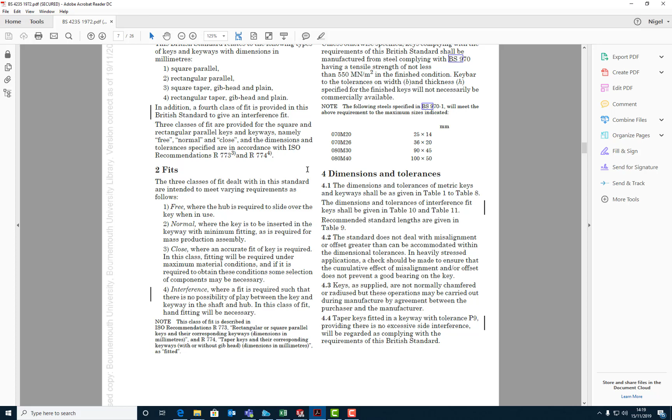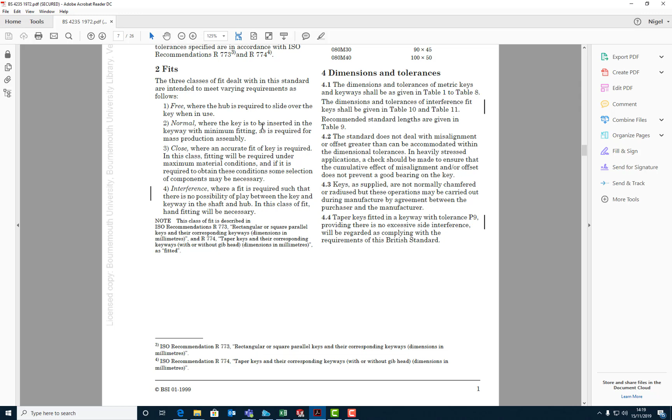So let's have a look on this PDF. I've put this PDF on Brightspace for you. This is all about metric keys and keyways, and it's BS 4235 Part 1 1972. So they've been doing this for a long time, and we still do it now. This is the way you do it. Some materials, don't need to worry about it, just have a look at this. Free, we don't want it to slide over. Normal, yeah, that sounds alright, doesn't it? That's the type of fit we want. We want a normal fit, so we just need to make sure we remember that as we scroll down.

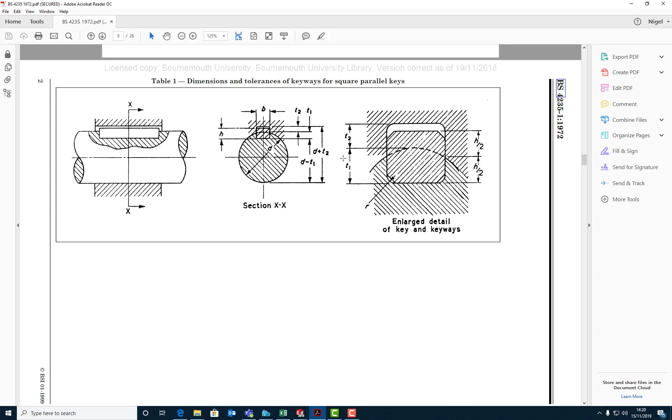Here's the dimensions of basically the holes that we need to drop in there. So this is the depth of the hole, T1, we just need to remember that, and B is the breadth. Let's have a look. Here we go. So the width B, that's nominal. Here's the diameters of the shaft. Now my shaft diameter was, if I can remember, 14. So between 12 and 17. That's my diameter there. So I need a 5x5 key. That's not the length, that's just the square section, 5x5.

And for a normal fit, on the shaft I need an N6 tolerance. Sorry, an N9, what am I talking about? N9. So that gives you between 0 and 30 microns undersized. And on the gear, that's the hub, it can be plus or minus 15 microns. So let's have a look at the depth of the cut that we need into the shaft. Nominally, we need a 3mm deep hole, plus 0.1 minus 0.

So it's probably easier if we make the hole depth 3.05, then we can have plus or minus 0.05. What that means is we can have a 0.1mm profile tolerance on the depth of the hole. That makes it a lot easier to dimension that feature on the shaft itself. So we're going to split that tolerance instead, so it'll be a 3.05 deep hole and 5mm wide, and then we just need to set the length.

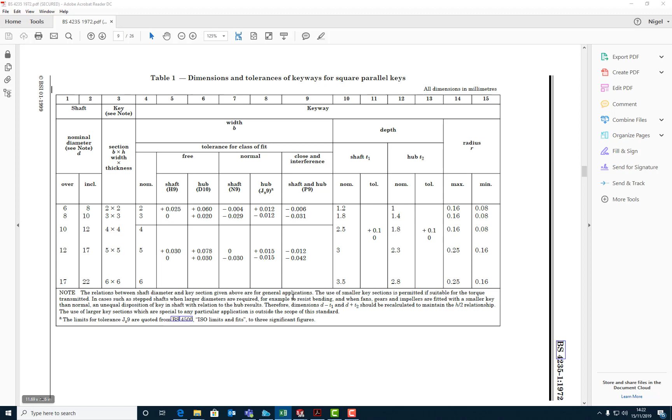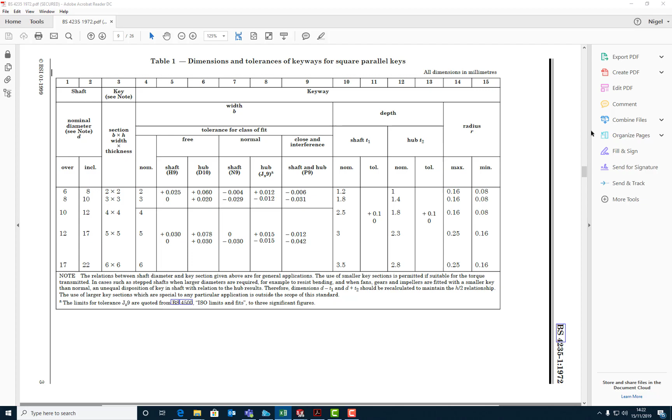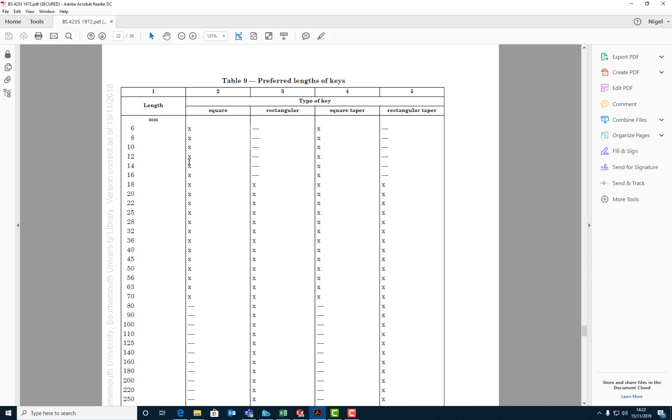And as you can see, somewhere on here it tells you which table you need for typical lengths. It doesn't say on there, but I happen to know that it's table 9, not 8, table 9. These are typical lengths, so these are preferred lengths. So you wouldn't want a 17 or a 15mm length of key because it wouldn't work. So we'll probably put a 14mm key in that slot, or maybe a 12. But we'll look at it in a minute. So we're going to put a keyway of 14mm, let's say, in our shaft.

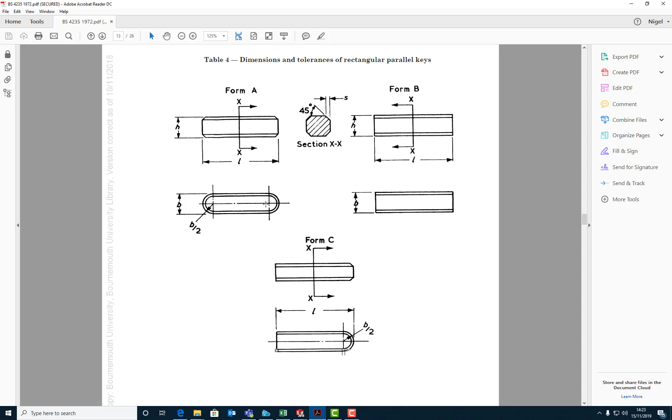So just click up. This is what the key looks like. You see, it's lozenge shaped. And it just drops in. And it just needs a little chamfer on the edge. And L is the overall length, not the distance between centres, but the overall length. So we'll have a 14mm long slot. So let's go back to SolidWorks.

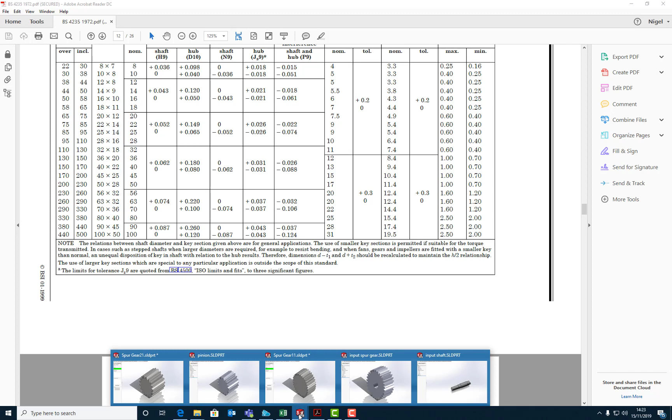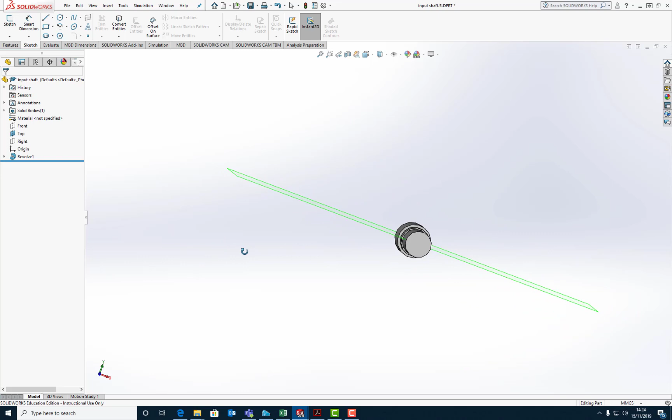And we will go to our input shaft, and what we need to do is set up some planes. So the first thing is, let's turn on the top plane so that we can see it. There we go, top plane is turned on, and that bisects the shaft. Now at some point you might change the size of this, so you don't want to measure directly off this surface, but you want to measure off the top of here. So we need to set another plane up parallel with this one and sitting on this one.

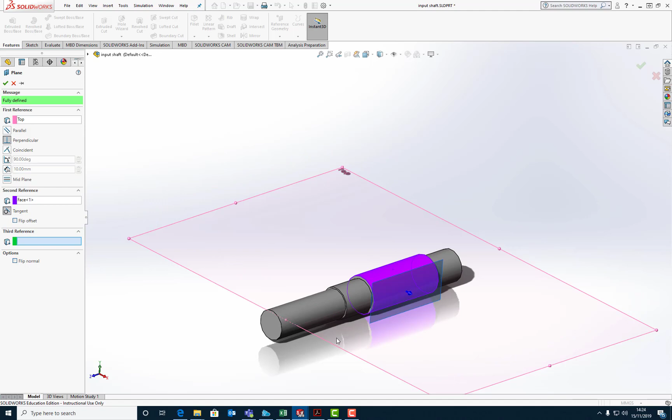So features, reference geometry, plane. First reference is going to be this plane. Second reference is going to be the cylinder. Now you see how it's trying to put it perpendicular. We don't want it perpendicular. Here's the perpendicular setting. We want it parallel, like so. And we click OK. Now we can turn off our top plane. We don't need that anymore. And here's our new plane that we're going to sketch onto.

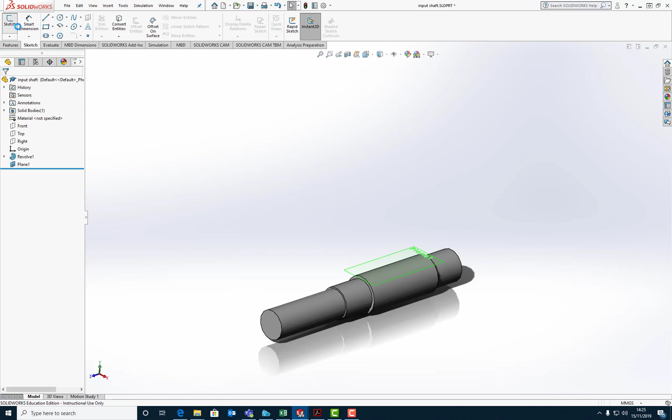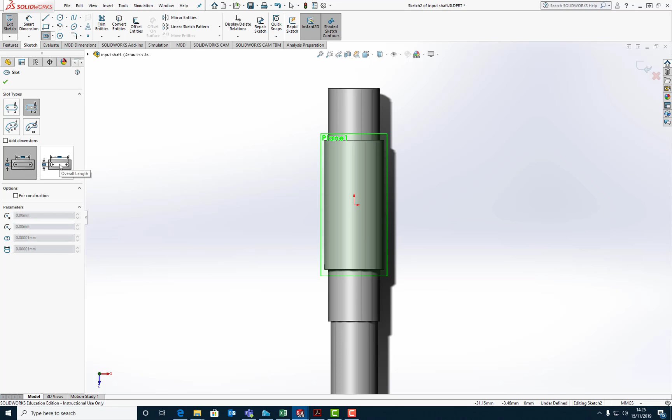So sketch, and we'll pick up that plane. If I hit the space bar, I can go normal to it. So you can see now that our origin sits in the middle, doesn't it? Remember when we built the shaft, we said put the origin in the center of that segment. Just as well I did, because this makes life really easy. Now here's some slot settings. This is the one we want, center point straight slot. And what we also want is not this setting, but this setting, overall length. So we'll just click on there, drag up, click, drag out, click. It's as easy as that.

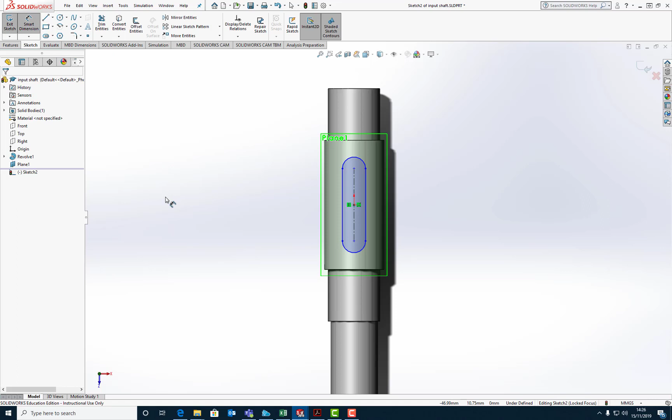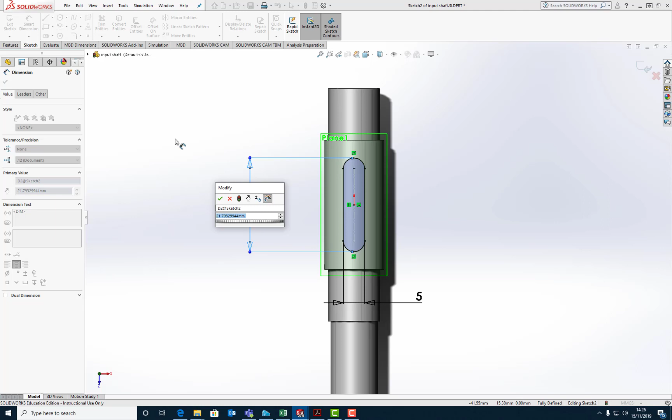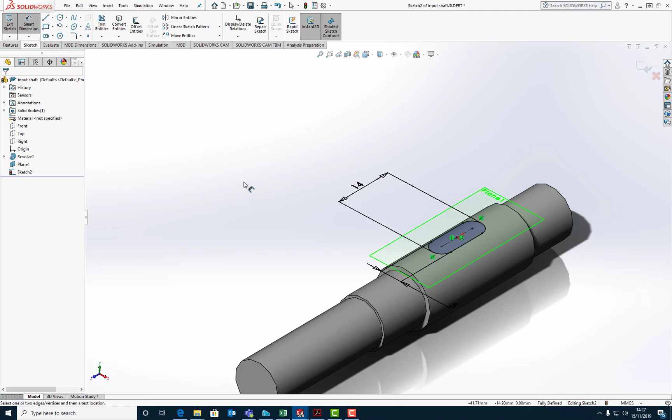Okay. Now we need to dimension it, otherwise it's not going to be the right size. So we need to set a width. And I believe that needed to be 5, didn't it? So let's make that 5. And then we need an overall length. So watch out. There we go. And this needed to be 14. And obviously it depends on the actual diameter that you have here for your gear. You don't want this diameter too small if you've got a really big gear, because it will just have too much torque going through it and it will just twist off, and it's just rubbish, essentially. Right, that's the technical term anyway.

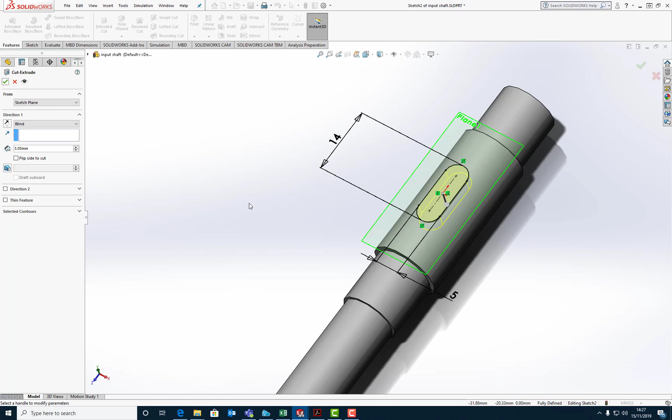So there's my slot. I'm going to extrude cut that. Features, extrude cut. Now if we remember, the default is 3 plus 0.1 minus 0. We don't want it to be plus 0.1 minus 0. We want to go half. We want to extrude this midway through that tolerance zone. So 3.05. And it'll be different for everybody's because it depends on the size of your shaft as to the size of your hole. That's it. And we'll click OK. And there's the slot done. Okay. Everybody happy? Thought so.

Right, at that point you can probably just turn that plane off. Don't delete the plane and don't suppress the plane. Just switch it off. And I'm just going to swing this round so it's dimetric. There we go. What a lovely job.